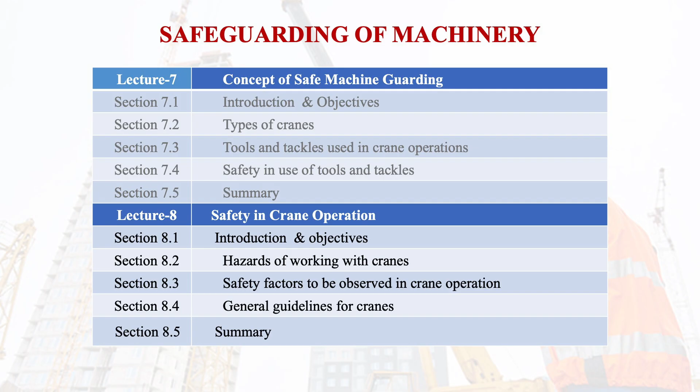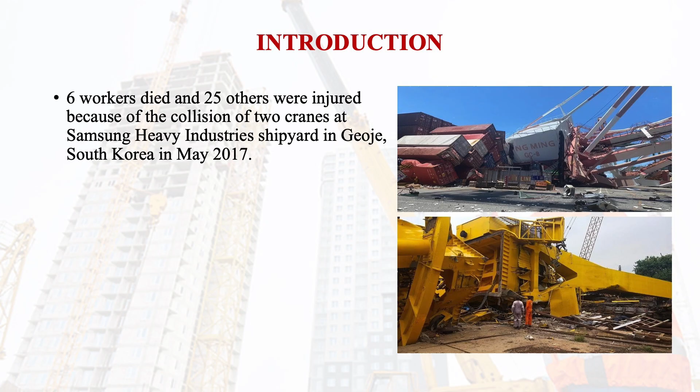6 workers died and 25 others were injured because of the collision of 2 cranes at Samsung Heavy Industries shipyard in Geoje, South Korea, in May 2017. The company believed that the accident was the result of a miscommunication between crane drivers and the signal people.

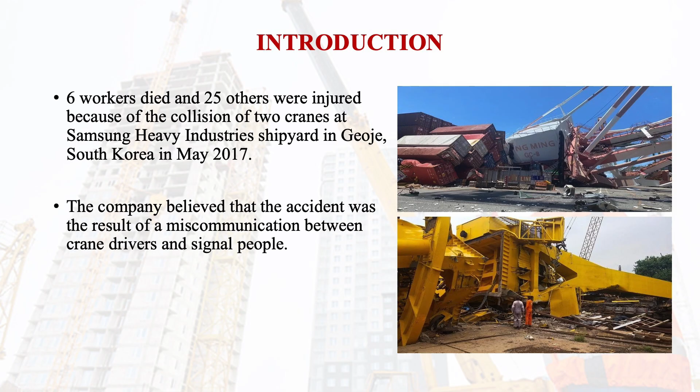This again shows that there was inadequate training to the workers regarding communication during crane operations and signals to the people working in that vicinity.

OSHA's analysis of crane accidents identifies the major cause of crane accidents as boom or crane contact with energized power lines. Nearly 45% of the cases of accidents are due to this reason.

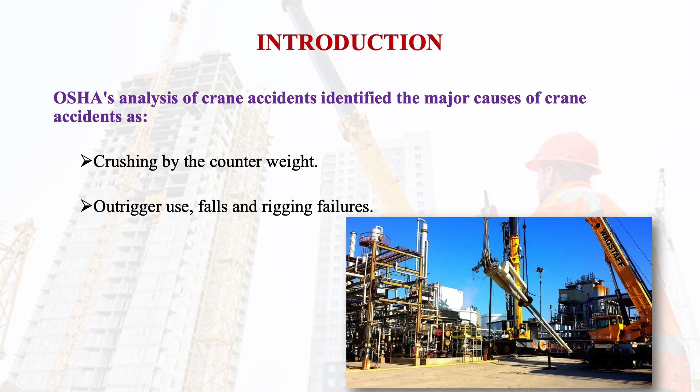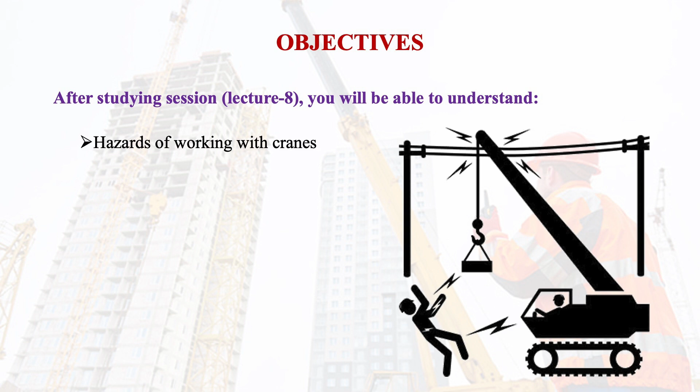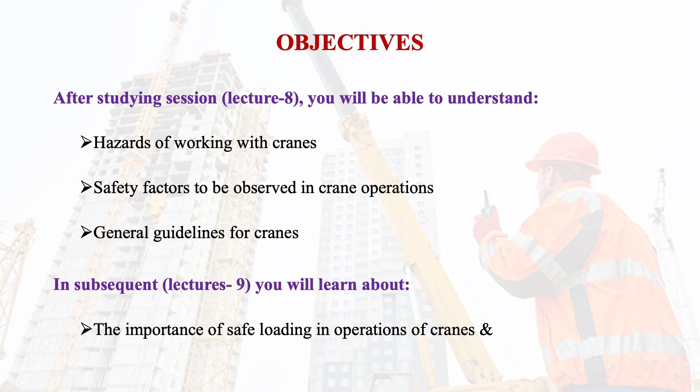The objective of this session is that we should be able to understand the hazards of working with cranes, safety factors to be observed in crane operations, and general guidelines for cranes. In subsequent lecture 9, you will learn about the importance of safe loading in operations of cranes and related aspects of cranes.

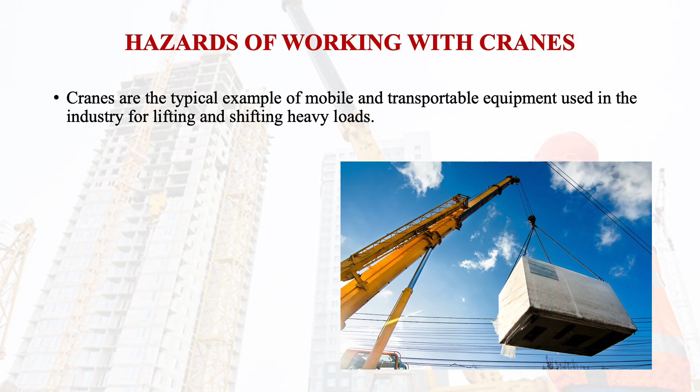Cranes are a typical example of mobile and transportable equipment used in industry for lifting and shifting heavy loads. At the same time, cranes are quite prone to accidents.

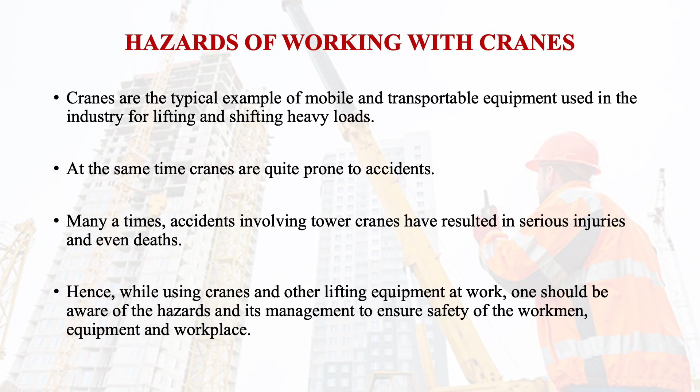Many times, accidents involving tower cranes have resulted in serious injuries and even death. Hence, while using cranes and other lifting equipment at work, one should be aware of the hazards and their management to ensure safety of the workman, equipment, and workplace.

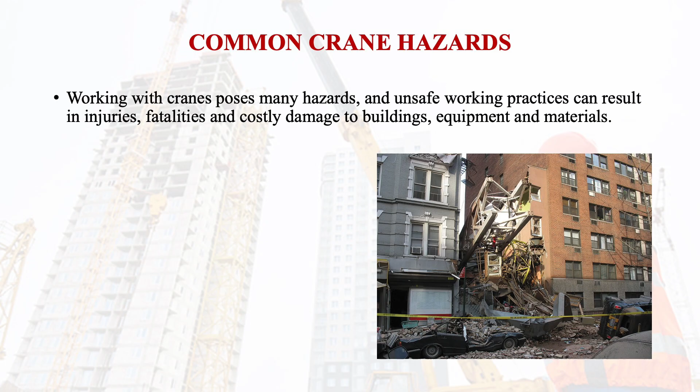Working with cranes poses many hazards, and unsafe working practices can result in injuries, fatalities, and costly damage to buildings, equipment, and materials. So it's important to be aware of the main hazards and how to manage them.

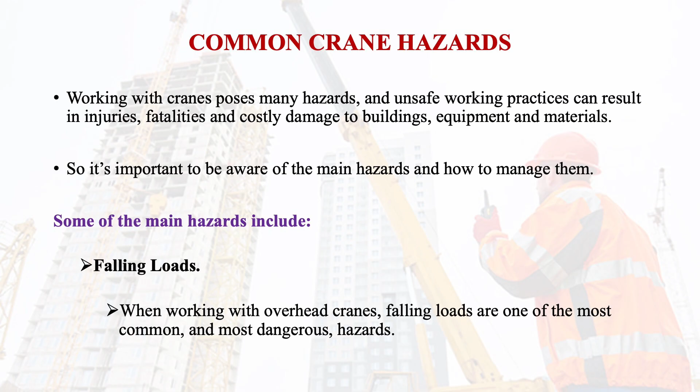Some of the main hazards include falling loads. When working with overhead cranes, falling loads are one of the most common and most dangerous hazards. A falling load can result in serious injuries, fatalities, and significant structural damage to the building and property, leading to significant time and loss of money.

Falling load from an overhead crane could be the result of operators' incompetency. Ensure the workmen are adequately trained so that they are able to carry out their roles and responsibilities safely.

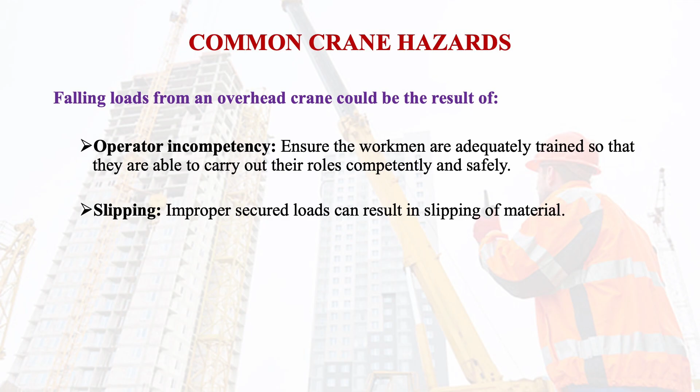Slipping of materials: improperly secured loads can result in slipping of material. Mechanical failure can be reduced if a competent person carries out routine inspections, maintenance, and repairs at scheduled intervals.

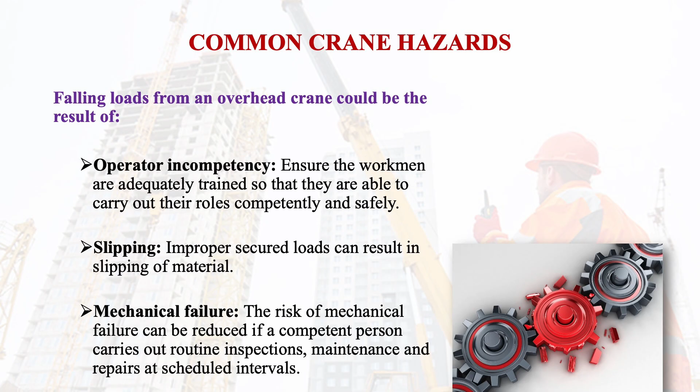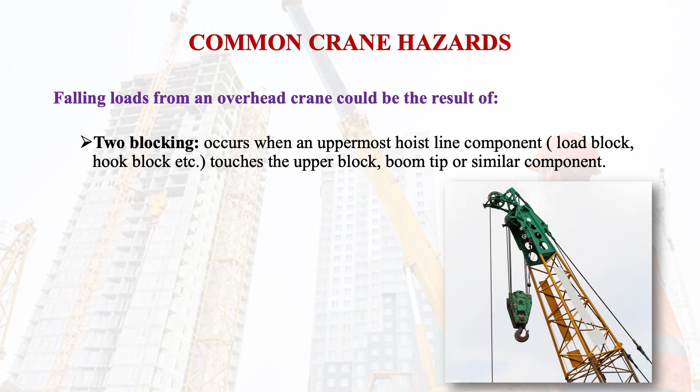Two blocking occurs when an uppermost hoist line component like the load block or hook block touches the upper block, boom tip, or similar component. When two blocking occurs, increased tension is placed on the line, which can result in falling of loads or crane components.

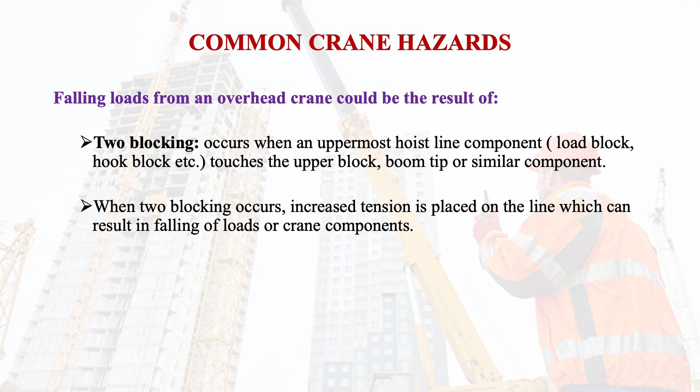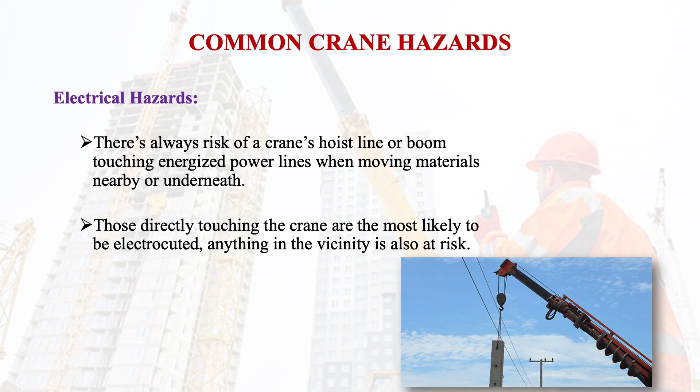Anything in the vicinity is also at risk. Therefore, pre-job planning for the work should be done, and that will help in prevention of such accidents.

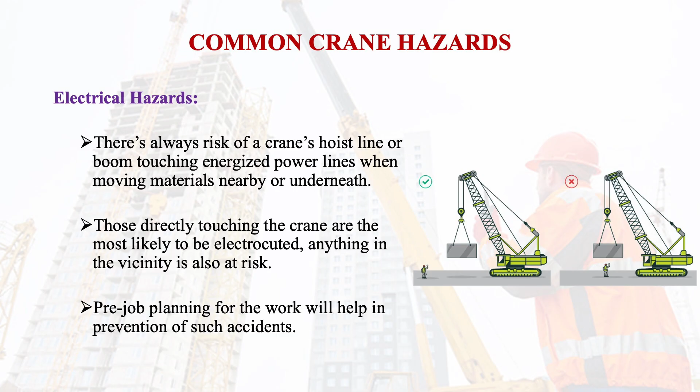On April 7, 2021, recently in Fort Lauderdale, Florida, USA, a serious accident happened wherein a crane that touched a live power line caused an electrical explosion which landed a worker in hospital and injured another worker who is still in serious condition.

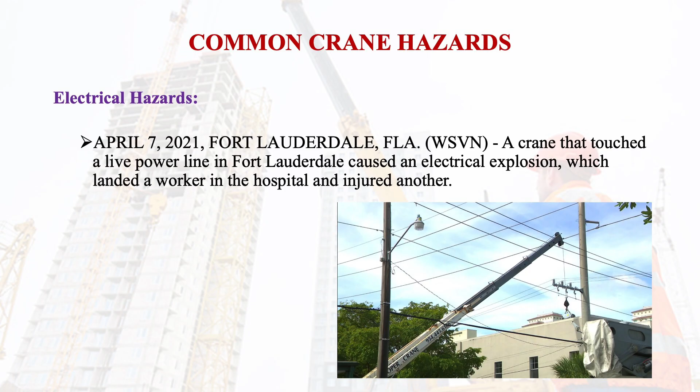These power lines may be as high as 138,000 volts. Crane overloading is another hazard of working with cranes.

Mostly, crane structural failures are the result of overloading a crane. Exceeding a crane's operational capacity may subject it to structural stresses and cause irreversible damage to the crane.

Whatever deformation is caused due to overloading cannot be repaired. Let's discuss some of the crane overloading reasons.

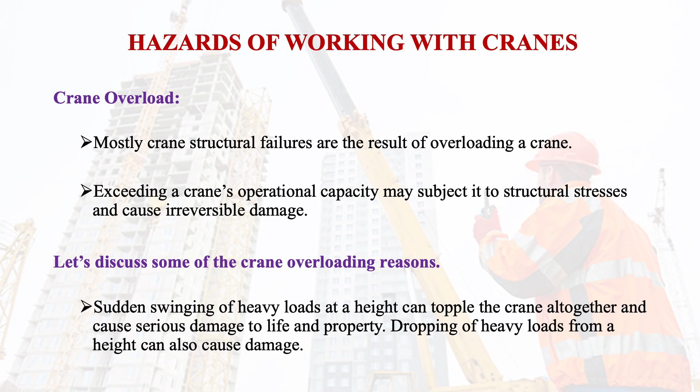Sudden swinging of heavy loads at a height can topple the crane altogether and cause serious damage to life and properties, and dropping of heavy loads from a height can also cause damage.

Electric overhead traction cranes, normally we call EOT cranes, are mostly used in shop floors. Loading a crane with unknown weight to be lifted and moved, cranes are likely to be overloaded. Such practices often lead to disaster.

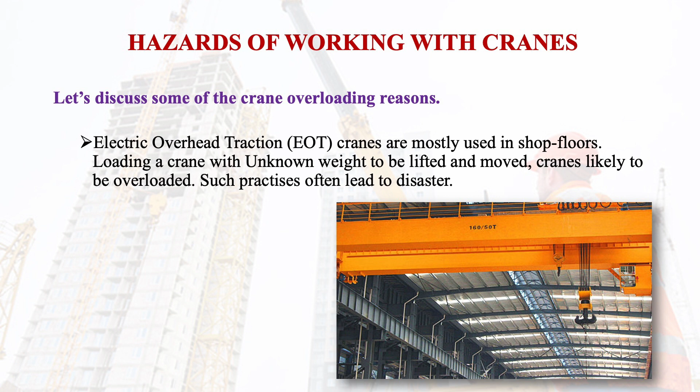And where from do these unknown weights come? At shop floors, several assemblies are being carried out. So many fabrications are there, and the weight is not measured. It is just an approximation of the weight, and that may result in overloading of the cranes, and that will cause a fatal accident.

The tendency to manage with the available resources at the site leads to overloading of cranes, often with fatal consequences. One may follow the crane's rated load while loading but find the hanging hook to be underrated, and that may take the risk which may soon turn into a disaster.

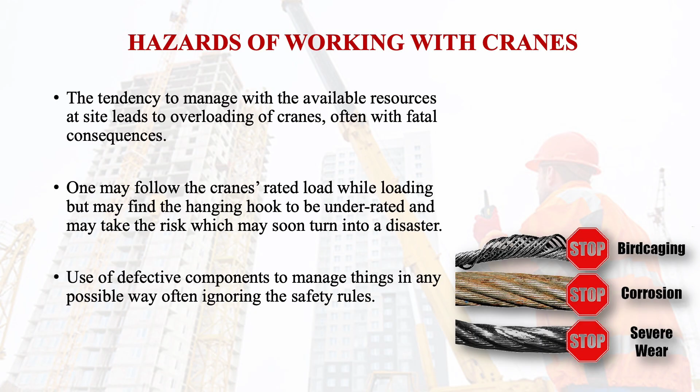Use of defective components to manage things in any possible way, often ignoring the safety rules, is also a cause of overloading. It is the responsibility of a safety engineer to change such habits and provide the right resources.

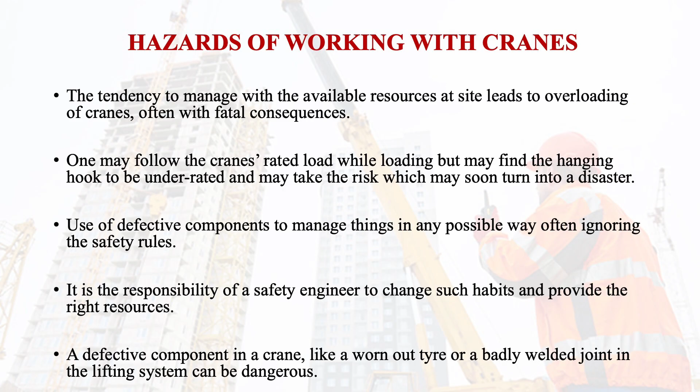A defective component in a crane, like a worn out tire or a badly welded joint in the lifting system, can be dangerous. Loads are always meant to be lifted vertically by cranes, but to accommodate working conditions, operators sometimes drag or side pull the loads.

When the loads finally leave the ground, it can swing and cause a lot of damage to life and property, including toppling of the crane itself.

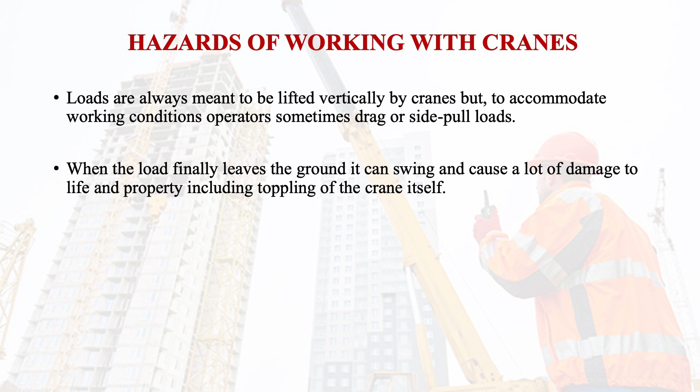Not paying enough attention to the loading chart provided on the body of the cranes is another hazard of working with cranes. Cranes have a very clear loading chart and instructions fixed to the body of the crane in a visible location where it is least likely to be damaged. One needs to pay enough attention and study the chart before loading the crane.

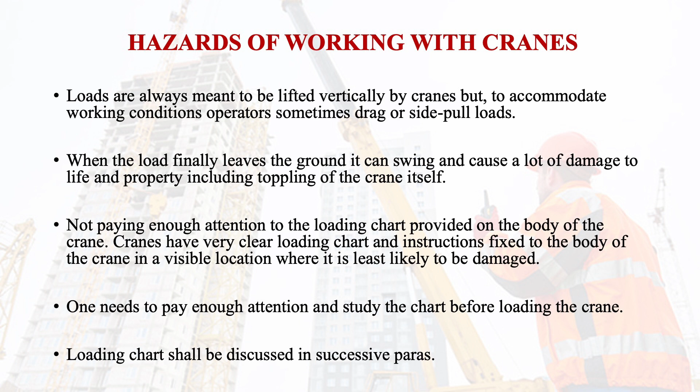Loading charts shall be discussed in successive paras. Safety factors in crane operations to be adopted.

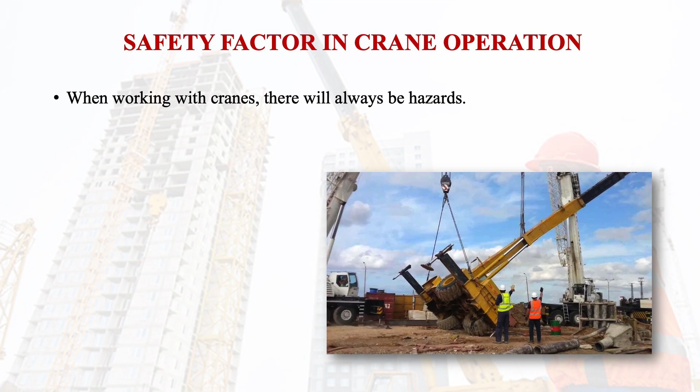When working with cranes, there will always be hazards, and risk can be minimized by taking appropriate precautions while undertaking all the operations safely. To carry out your crane operations safely, you should appropriately train all the employees.

You should also ensure preventive maintenance as per schedule. The employer has a legal responsibility to provide appropriate health and safety training to all employees so that they become competent for their jobs. This will increase workplace safety, satisfaction and profit, and reduce the chances of injury, fatalities, accidents and sickness.

Absence, machine downtime and repair cost are also reduced.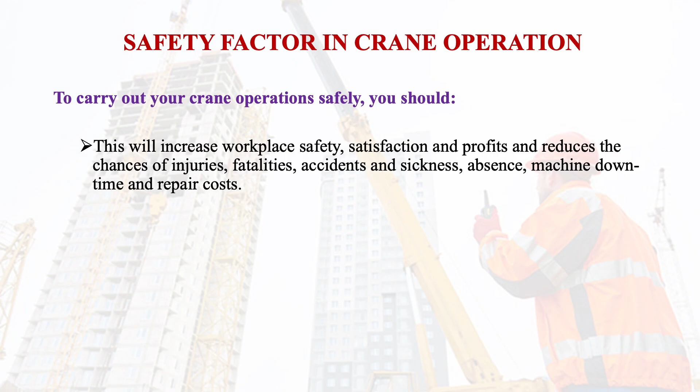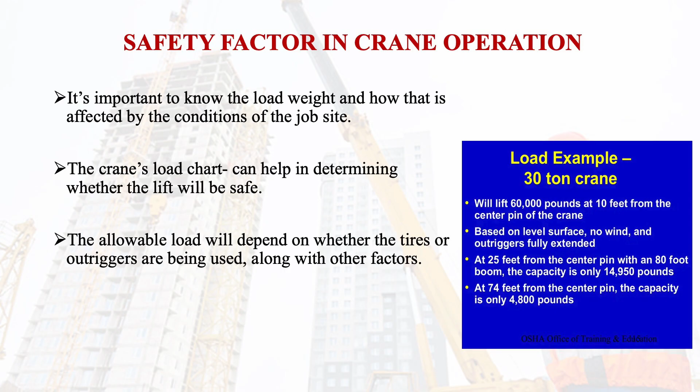It's important to know the load weight and how that is affected by the conditions of the job site. The crane's load chart can help in determining whether the lift will be safe or not. The allowable load will depend on whether the tires or the outriggers are being used, along with other factors.

For example, asphalt may seem to be a stable surface, but on a warm day it may become very flexible. Even concrete may not provide enough strength if there is a void beneath it.

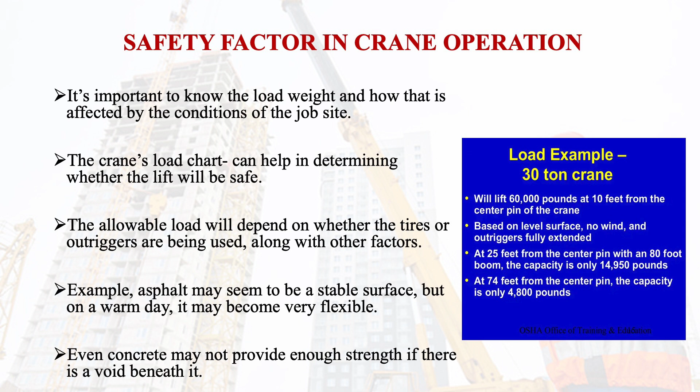From a load chart in the right hand side figure, we will explain one example of a 30-ton crane. This crane will lift 60,000 pounds at 10 feet from the center pin of the crane, based on a level surface, no wind, and outriggers fully extended.

At 25 feet from the center pin, with the 80 feet boom, the capacity is only 14,950, or roughly you can say 15,000 pounds.

At 74 feet from the center pin, the capacity is further reduced to only 4,800 pounds. Therefore, we should clearly see from the chart whether the load being lifted or moved by the crane is safe or not. This will avoid the overloading of the crane.

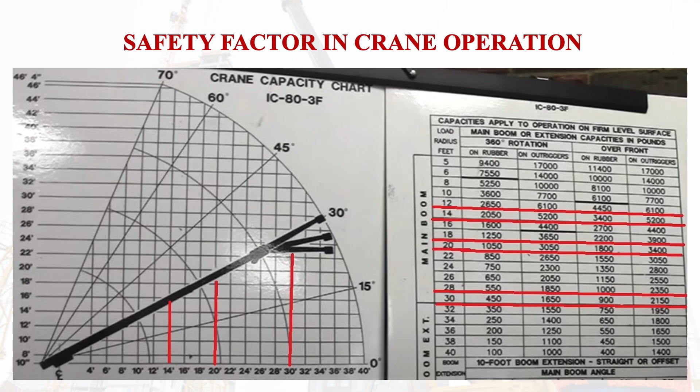You will see in the figure that closer to the pin, the boom's capacity for lifting the load is more, and as we go further, the capacity reduces. This safe working load also depends on the angle of the boom. Therefore, we should use this chart in combination with the distance from the pin of the load being lifted and the angle of the boom where the load is being attached.

Safety factors in crane operations. For example, the swing radius of a crane is the distance from the hanging point to the farthest edge of the mobile crane. It is this distance, at least, that the mobile must be hung from a wall or other object so that it can rotate freely.

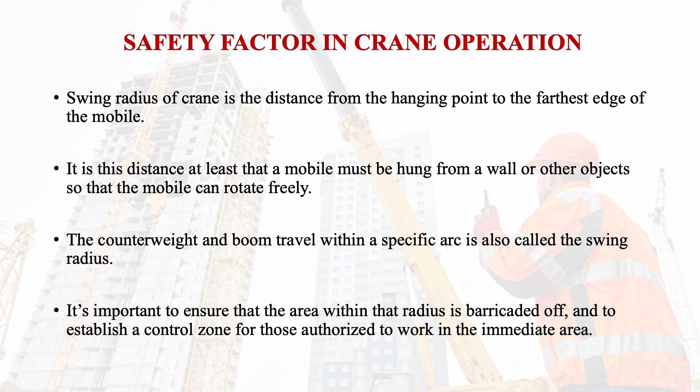The counterweight and boom travel within a specific arc is also called the swing radius. It is important to ensure that the area within that radius is barricaded off and to establish a control zone for those authorized to work in the immediate area.

We should not allow unauthorized persons, or persons not required for that particular task. Therefore, we should religiously control the number of people in such areas so that we can reduce accidents.

It prevents personnel from being struck or crushed by the crane. The barricade must include the maximum swing radius of the counterweight, which extends past the main body of the crane.

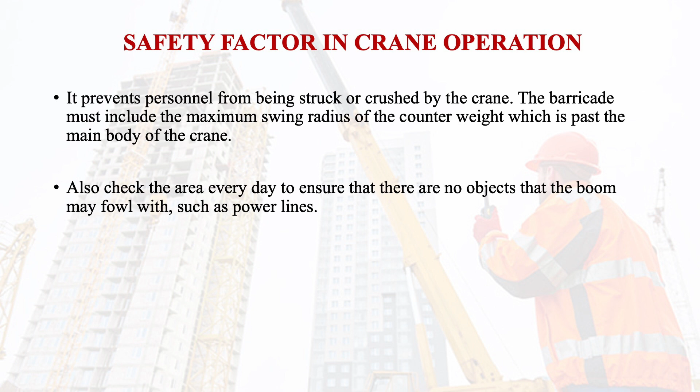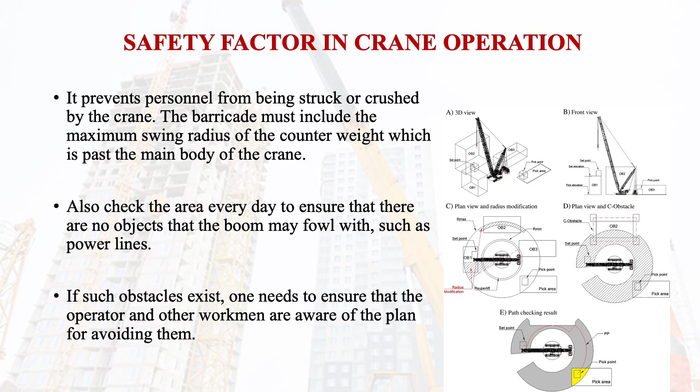We should also check the area every day to ensure there are no objects the boom may contact, such as power lines. If such obstacles exist, one needs to ensure that the operators and other workmen are aware of the plan for avoiding them. We should use the crane properly.

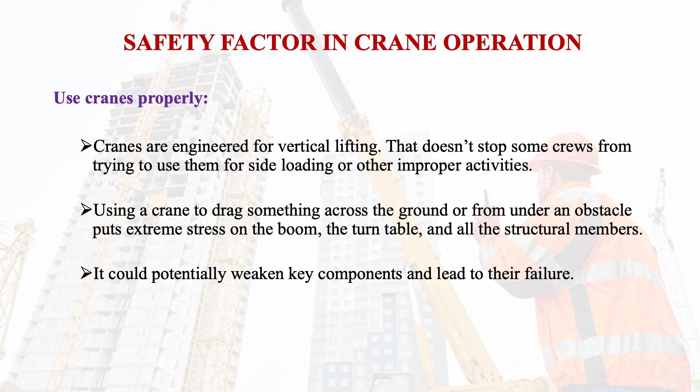Cranes are engineered for vertical lifting. That doesn't stop some crews from trying to use them for side loading or other improper activities. Using a crane to drag something across the ground or from under obstacles puts extreme stress on the boom, the turntable, and all the structure's members. It could potentially weaken key components and lead to their failure.

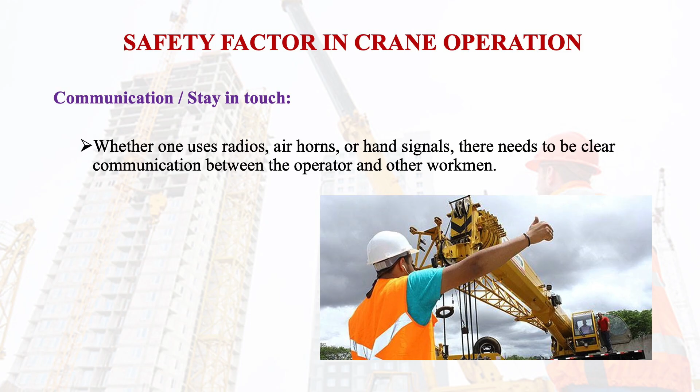Communication, or staying in touch, is another factor we should pay proper attention to. Whether one uses radios, air horns, or hand signals, there needs to be clear communication between the operator and the workman. That's especially critical when a crane is making a lift in which the operator cannot see the load.

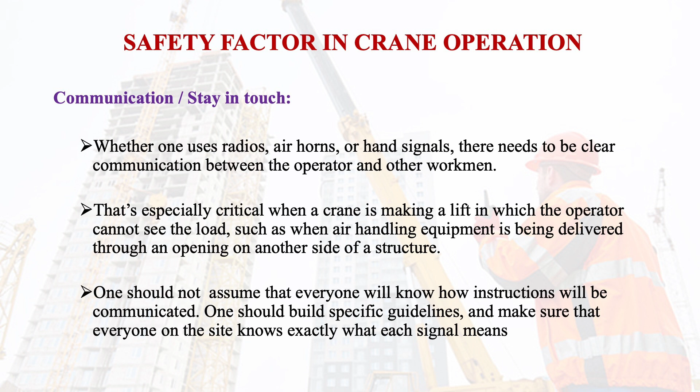Such as when air handling equipment is being delivered through an opening on another side of the structure. One should not assume that everyone will know how instructions will be communicated. One should build specific guidelines and make sure that everyone on site knows exactly what each signal means.

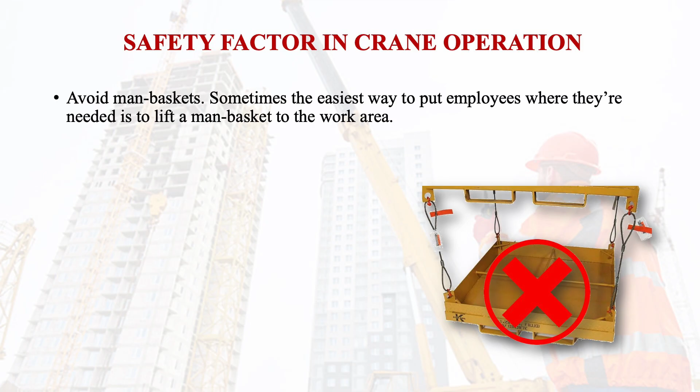Avoid man baskets. Sometimes the easiest way to put employees where they are needed is a man basket to the work area. However, that approach creates hazards that must be tested and addressed before work begins, such as providing proper fall protection, verifying basket capacity, and checking that the basket is properly attached. Before using a man basket, consider whether an articulating boom lift or a scissor lift might provide a safer alternative.

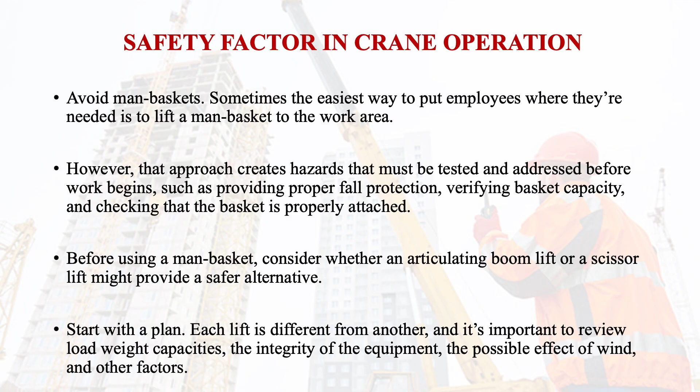Start with a plan. Each lift is different from another, and it's important to review load weight capacities, the integrity of the equipment, and the possible effect of wind and other factors. The operator, riggers, and other workmen involved with the lift should be part of the planning process.

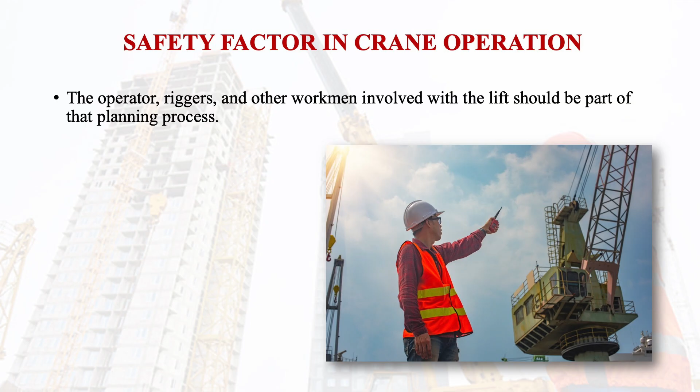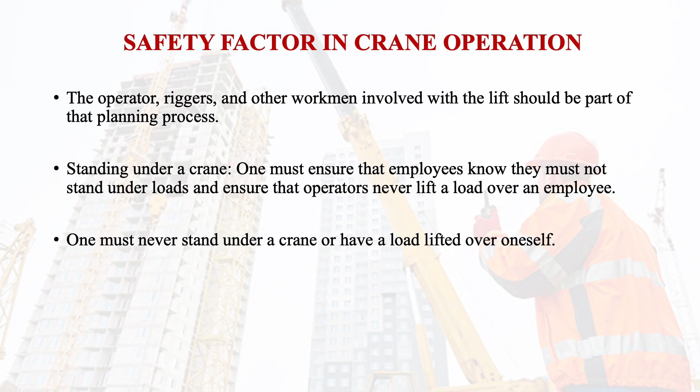One must ensure that employees know they must not stand under loads, and ensure that operators never lift a load over an employee. One must never stand under a crane or have a load lifted over oneself.

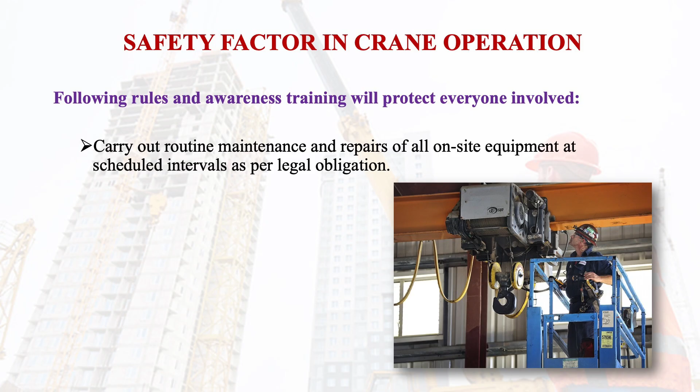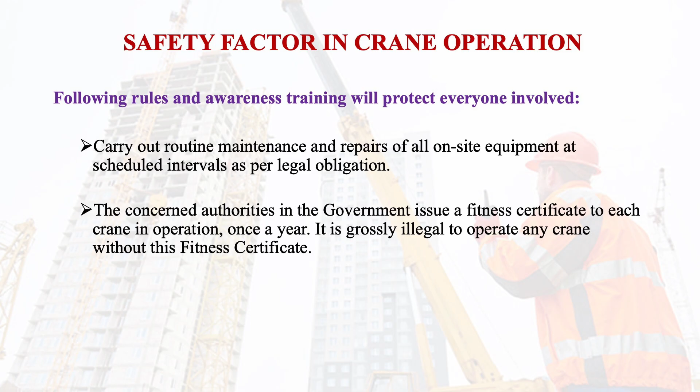Carry out routine maintenance and repairs of all on-site equipment at scheduled intervals as per legal obligations. The concerned authorities in government issue a fitness certificate to each crane in operation once a year. It is grossly illegal to operate any crane without this fitness certificate.

Checking the operating functions daily is another important safety factor. It's important to check the operating functions daily to ensure that everything is working properly and that there are no defects or cracks in the support chambers.

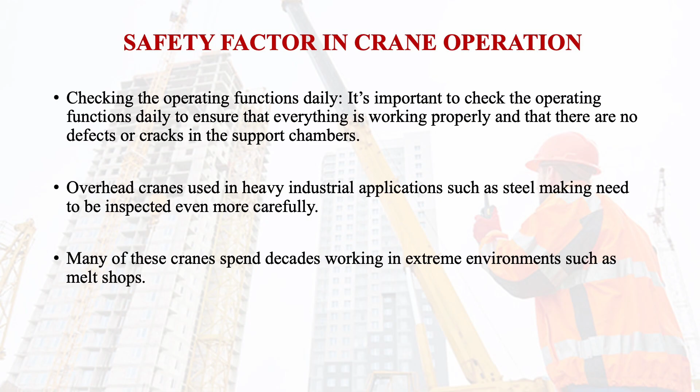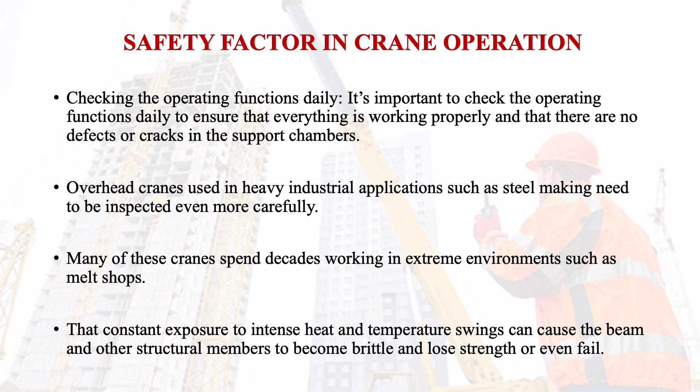Overhead cranes used in heavy industrial applications such as steel making need to be inspected even more carefully. Many of these cranes spend decades working in extreme environments such as melt shops. That constant exposure to intense heat and temperature swings can cause the beam and other structural members to become brittle and lose strength or even fail.

Ensure a supervisor is present on site at all times when cranes are in operation. Make employees aware of and strictly enforce loading and lifting limits. Ensure clear warning signals are displayed on site when needed.

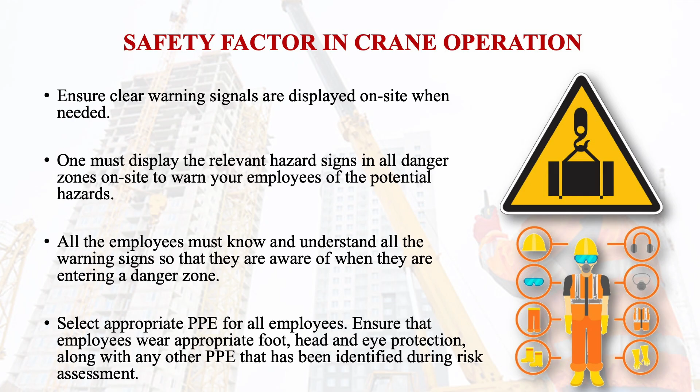Ensure that employees wear appropriate foot, head and eye protection along with any other PPE that has been identified during the risk assessment. Single crane multiple winch lift is a complex operation. Some single cranes are designed to lift a load using both the main and auxiliary winches. Single crane multiple winch lift can be undertaken on these cranes in accordance with the manufacturer's instructions.

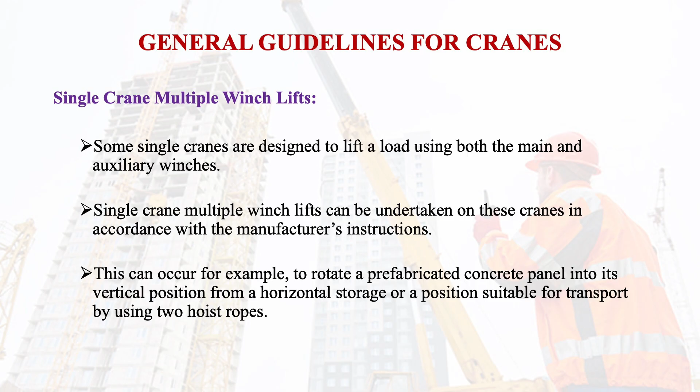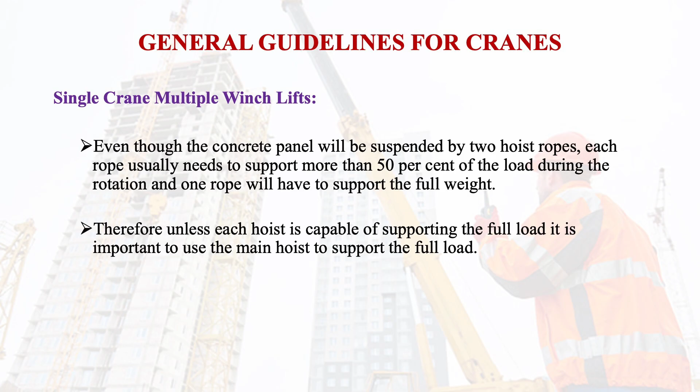This can occur, for example, to rotate a prefabricated concrete panel into its vertical position from a horizontal storage or a position suitable for transportation by using two hoist ropes. Even though the concrete panel will be suspended by two hoist ropes, each rope usually needs to support more than 50% of the load during the rotation and one rope will have to support the full weight. Therefore, unless each hoist is capable of supporting the full load, it is important to use the main hoist to support the full load.

The actual load to be carried by each winch and rope should be calculated and documented by a competent person, such as an engineer, before the lift commences. Where a single crane is used for rotation, one should use a crane designed and manufactured for simultaneous multi-winch use. Follow the crane manufacturer instructions. If needed, reconfigure the crane before it can be used in this way. Make sure the main winch and auxiliary winch drives are independent.

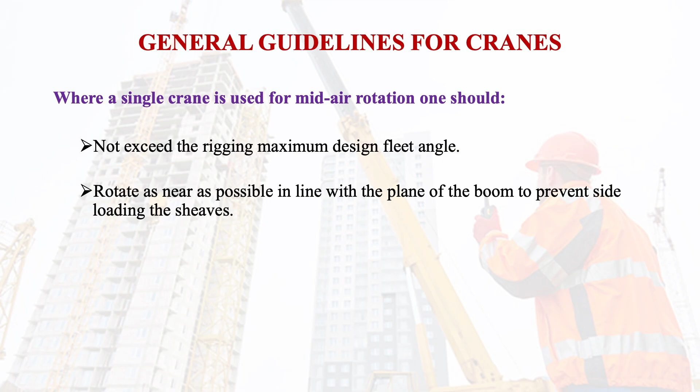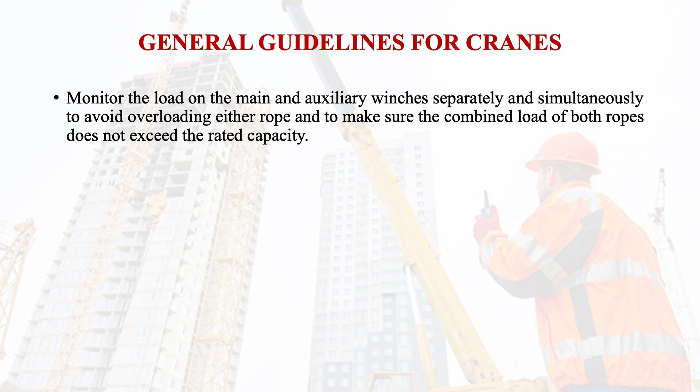You should not exceed the rigging maximum design fleet angle. Rotate as near as possible in line with the plane of the boom to prevent side loading of sheaves. Monitor the load on the main and auxiliary winch separately and simultaneously to avoid overloading either rope and to make sure the combined load of both ropes does not exceed rated capacity.

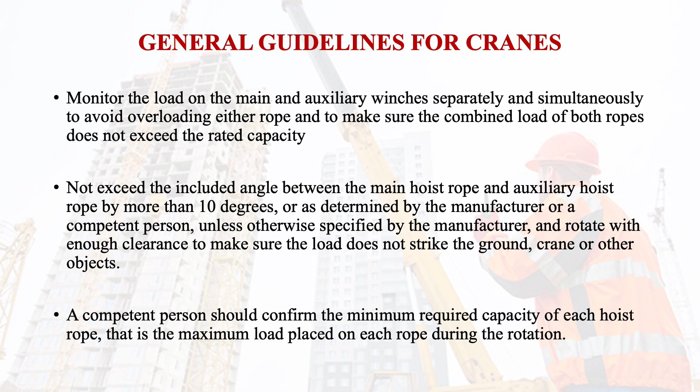Do not exceed the included angle between the main hoist rope and auxiliary rope by more than 10 degrees, or as determined by the manufacturer or a competent person unless otherwise specified by the manufacturer, and rotate with enough clearance to make sure the load does not strike the ground, crane or other objects. A competent person should confirm the minimum required capacity of each hoist rope, that is, the maximum load placed on each rope during the rotation.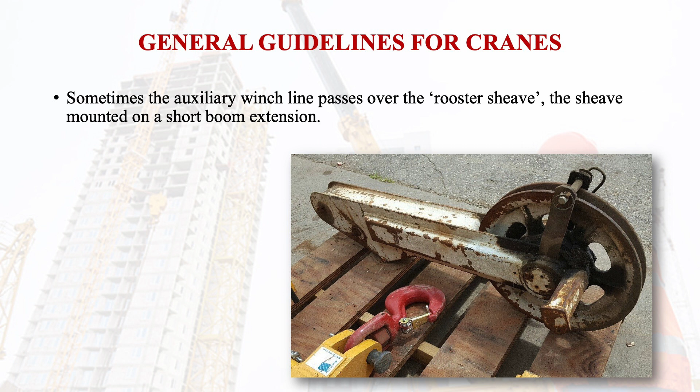Sometimes the auxiliary winch line passes over the rooster sheaves, the sheaves mounted on a short boom extension. Do not overload the rooster sheave, as some are not rated for the full line pull of the auxiliary winch and are not suitable for the purpose. Rooster sheaves and the associated rigging on the boom head should be designed and certified by a competent person. Multiple crane lift.

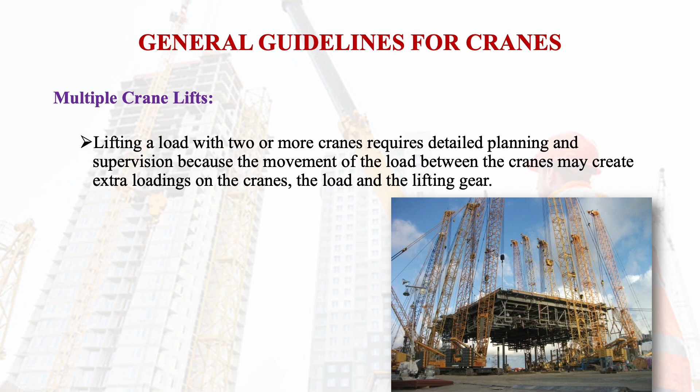Lifting a load with 2 or more cranes requires detailed planning and supervision because the movement of the load between the cranes may create extra loading on the cranes, the load and the lifting gears. The design capacity of a crane will not be maximum rated capacity, but the derated capacity relevant to the multi-crane lift to be carried out. The cranes to be used in the lift will need to be derated.

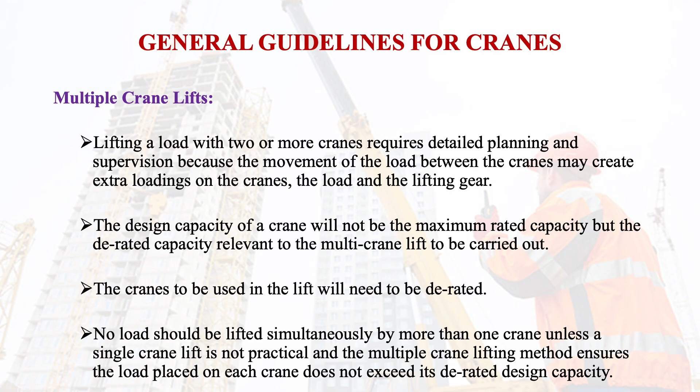No load should be lifted simultaneously by more than one crane unless a single crane lift is not practical and the multiple crane method is required. In such method, you should ensure the load placed on each crane does not exceed its derated design capacity. Where multi-crane lifts are carried out, a documented lift plan and procedure should be prepared by the competent person and it should be followed.

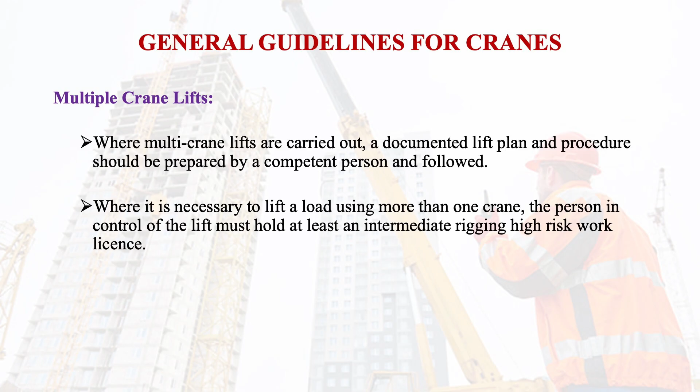Where it is necessary to lift a load using more than one crane, the person in control of the lift must hold at least an intermediate rigging high risk work license. This is very important. Not everybody can work on such cranes or multi-crane lifting. They should have a license for the rigging high risk work.

The crane used for demolition. Cranes should not be used for demolition or for wrecking work. If a crane is used for demolition, it should be thoroughly inspected and verified by a competent person after the work is complete as being in a satisfactory condition before it is used for general lifting. The results of the inspection must be recorded in the crane service logbook.

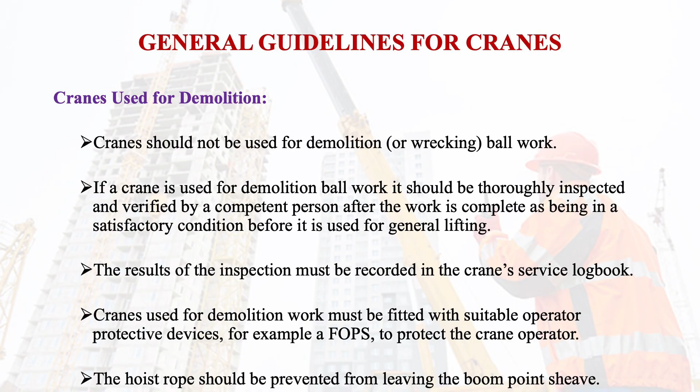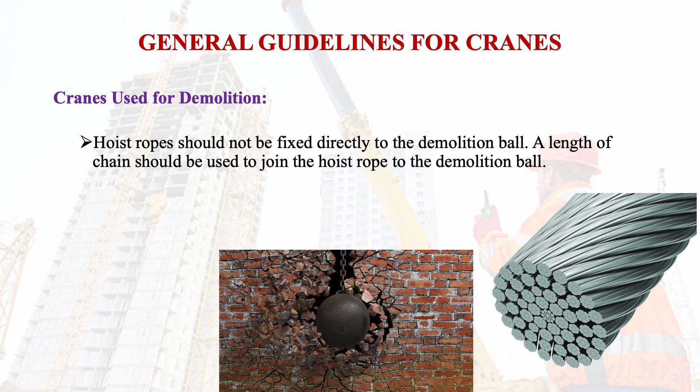Cranes used for demolition work must be fitted with suitable operator protective devices, for example, FOPS, to protect the crane operator. The hoist rope should be prevented from leaving the boom point sheave. Hoist ropes should not be fixed directly to the demolition ball. A length of chain should be used to join the hoist rope to the demolition ball. The chain should be at least 16 mm and at least 2 meters in length.

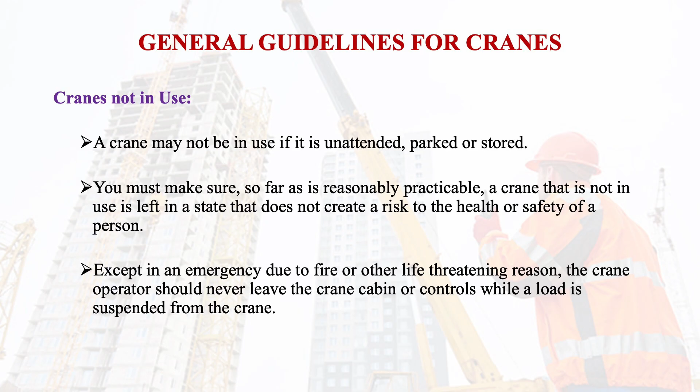Now, let us discuss the general guidelines for cranes that will prevent accidents. A crane may not be in use if it is unattended, parked or stored. You must make sure, so far as is reasonably practicable, a crane that is not in use is left in a state that does not create a risk to the health or safety of a person. Except in emergency, due to fire or other life threatening reasons, the crane operator should never leave the crane cabin or control while a load is suspended from the crane.

A crane should not be left unattended unless loads are removed from the hook or lifting device, the hook has been secured or raised to a position where it is clear of other operations, the crane is properly stopped, powered movements have been disabled and the keys are removed or the starting device locked out.

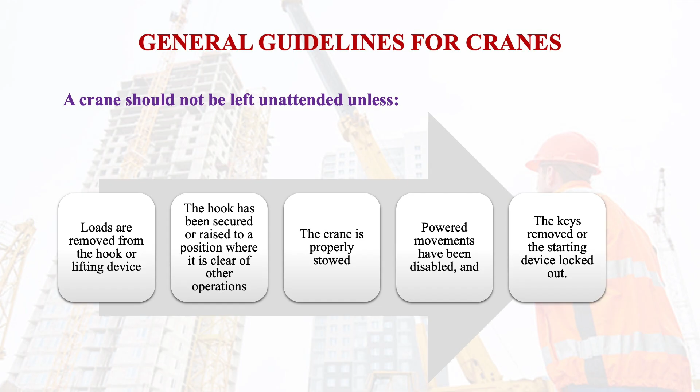When leaving a mobile crane unattended for a period of time, ensure the crane's boom is retracted and lowered as far as possible. Where there is no risk of a tower crane boom contacting other structures, the crane should be left to weather vane when unattended according to crane manufacturer's instructions.

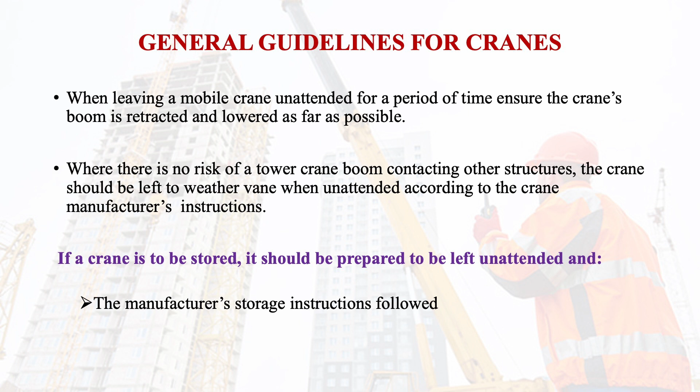If a crane is to be stored, it should be prepared to be left unattended and the manufacturer's storage instructions should be followed. Remote control equipment isolated, the power supply and controls isolated and locked off, storm anchors applied if fitted and doors and windows locked to prevent unauthorized access.

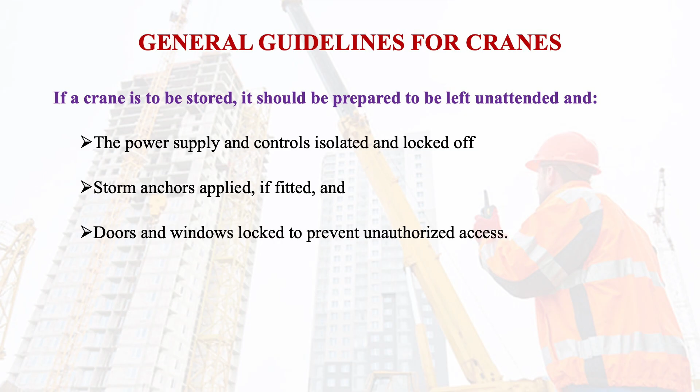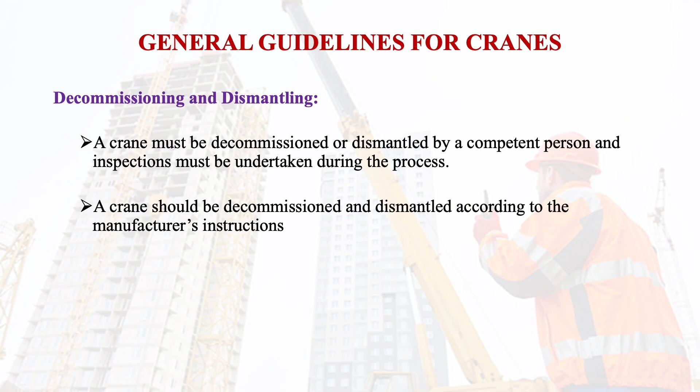There are certain guidelines for decommissioning and dismantling a crane after the life of the crane is over. A crane must be decommissioned or dismantled by a competent person and inspection must be undertaken during the process. A crane should be decommissioned and dismantled according to the manufacturer's instructions only.

Now we will summarize what we have discussed so far. In this session, we have discussed how accidents can take place with cranes, hazards of working with cranes, and factors to be observed for safe operation of cranes as well as general guidelines for cranes. And at the end we have discussed the decommissioning and dismantling of the crane.